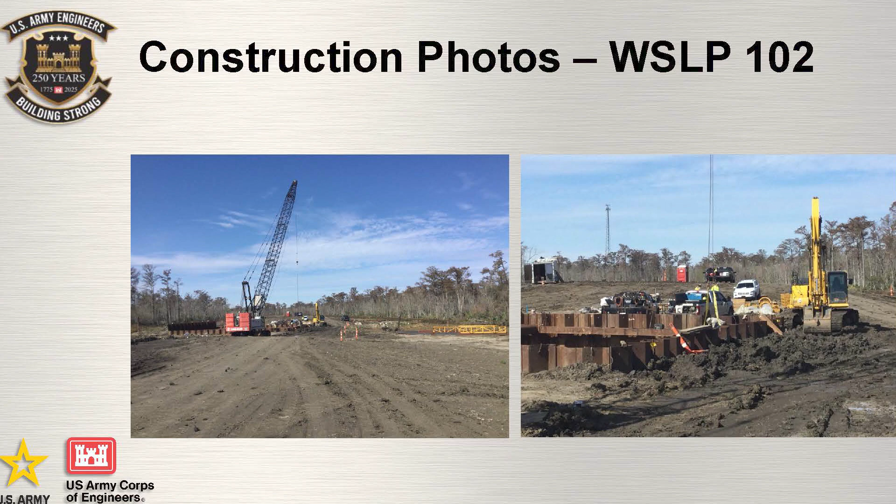The photo on the left is the wick drains, which is another nice-to-know feature. We're building on what we call virgin swamp. It's very, very hard to do the geotechnical, the principal geotechnical elements out there, it's very tough. It's swamp. So we have to get strength in the base of the levee before we can actually build on top. Those little white strip drains, called wick drains, get the water up and out. As we get the water out of the system, the base of the levee constantly gains strength.

And then we have hold periods. I don't know if you guys saw the story we had on Fox 8. We build a levee and then we do absolutely nothing for months and months at a time because we're letting the levee settle, it's building strength. Then we go back, we build more embankment, we wait for months and months, and then we do it again. That's why some of these contracts are as long as 1,500 days, to make sure that we are gaining the strength to build these levees.

Another feature, we'll post things on social media, on Facebook, and we'll use all of these technical terms. What are they talking about? A little pro tip: if you use the Meta AI feature and ask what are wick drains, or whatever it is we're talking about, it's amazing how accurately they'll explain what's going on in layman's terms. I've checked it a few times to see if it was really good, and I believe it's good. So if you ever see anything on our Facebook, the West Shore Lake Pontchartrain Facebook page, make sure to use that feature if you ever want more information about anything.

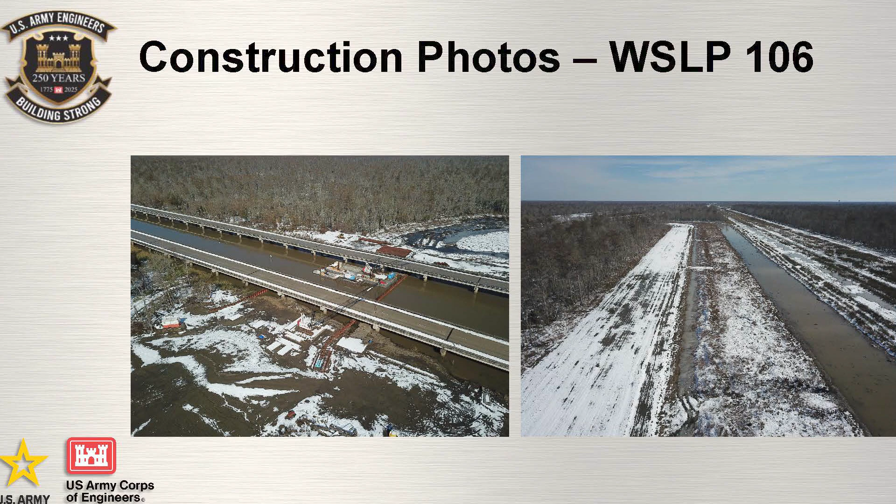And that's the 106, that's the other end where it crosses I-10, and we thought that was a real cool picture when it snowed, the 130-year event, on 106 there. And that's also 107.

109, this is one that just got kicked off last fall. As you can see, we've done clearing and grubbing. You see some smoke there, we're burning at 109, and we're moving. As you can see, it's connected to 110 there. That's pretty much the one I said is pretty much finished, and we're just waiting on grass to grow at this point.

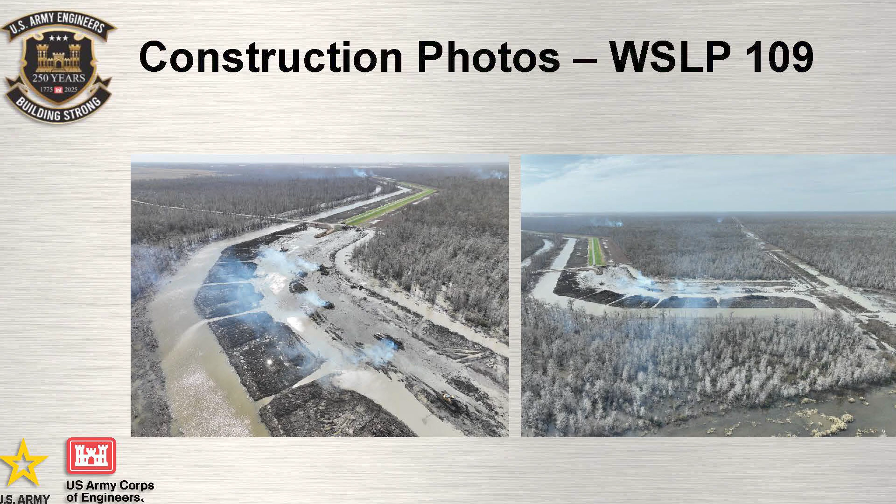The 114A project, this is the drainage structure project. If some of you recall, we had 4 pump stations originally in this project, but in an attempt to save money and be more efficient in our design, it was determined that 2 pump stations was more than adequate, just increasing the size of those pump stations instead of having 4 smaller ones. It was more efficient, more beneficial, and cost effective to do it that way.

So the 114A contracts are 2 drainage structures. They don't have any pumping capacity, but they're drainage structures, again, to get the water out of the system. So those are not the 2 pump stations we're talking about.

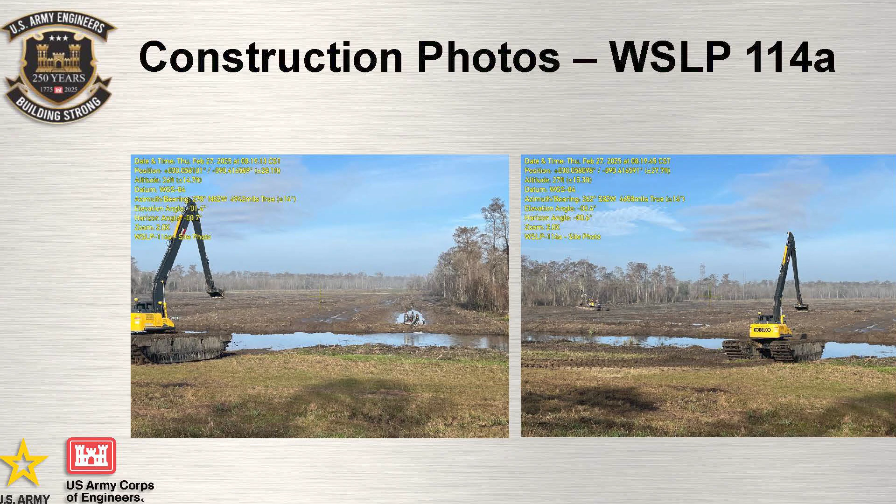So 114 got advertised last month. We are expecting to award in June. That process is going along really, really well. Contractor questions were due yesterday. I think we got 131 questions, which sounds like a lot, but for a pump station that's going to be between $200 and $300 million, that's not a lot. So what that tells us is we probably have a really good set of plans and specs if you don't get a lot of questions.

And just a point of information, if you know anything about the PCCP project in New Orleans, and there was a lot of issues with corrosion and that sort of thing, the same designer who did that pump station is doing this pump station.

So we have a ton of lessons learned. All of that information that we learned from PCCP, we incorporated into this project. So we have some real exotic metals and other measures so that we won't experience some of the issues they experienced on PCCP. That's a good point of information I wanted to share with you tonight.

And then we have two more contracts, 103A and 110A. Those are both small flood wall projects at utility crossings. The 110 is almost completed, but there's one section that's not. Why do you leave that out? Because there's a flood wall and pipelines going right through where the levee is built. You can't put a levee on top of a pipeline corridor, right?

So another cool thing we do at the Corps - these utility pipelines go through our flood wall. So when you're working with 4, 5, 10, 8 utility owners, that's tough. We go out and move forward on the levee work while we work through getting these utility agreements. Fortunately, that's pretty much done - we're almost there with most of these contracts, and we're on track. That's the last two contracts we have going on.

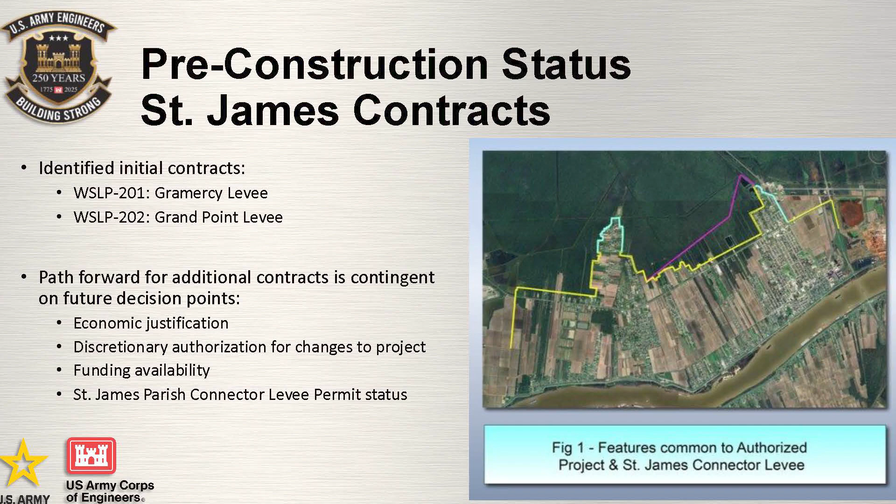We know that there are some features of the St. James contract that, no matter what we select, are going to be built anyway, so we were authorized by our leadership and command to go start those projects. If you are from St. James Parish, here are the two fuchsia sections at the ring levees that, no matter what alignment we wind up building, those features are going to be built anyway, so we started on that.

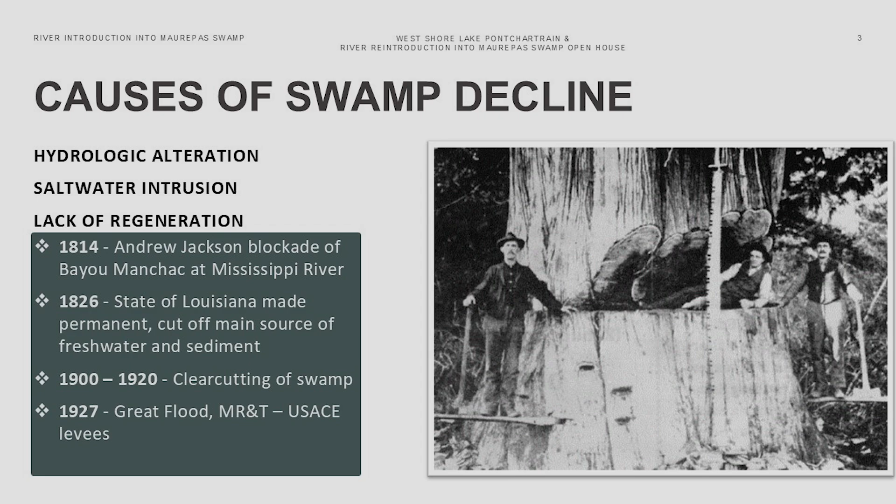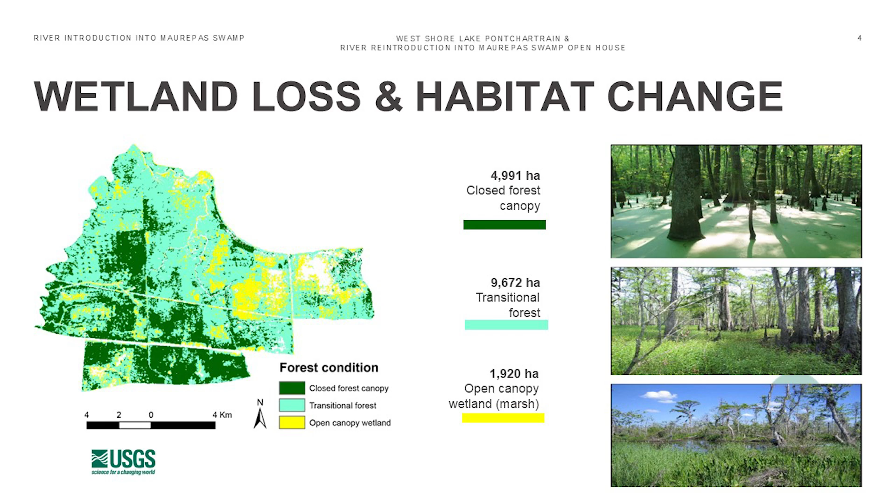The concept never changed until in 2018, West Shore Lake Pontchartrain got authorized. At that point in time, we took a little pause. We were at about a 95% design level. In 2017, we got money from the Deepwater Horizon oil spill to finalize design. We got all ramped up, got our contractors on board, and then West Shore got authorized, which is an awesome thing, right? But we quickly realized that these two projects are next door neighbors.

Around that time, we also came to the Corps and said, hey, first of all, we got to cooperate really, really closely. Also, is there a chance we can use the benefits from Maurepas as mitigation for West Shore? We got our higher-ups together, and that process took a couple of years. We, for the first time ever, made it so the benefits from Maurepas can be used as mitigation for West Shore. It took a ton of collaboration. We had to redo a bunch of studies, which no one likes to hear, but in the end of the day, it worked out great.

So now, if you remember a few slides ago, we had conveyance channel and guide levee. Now on the west, we have guide levee, conveyance channel. On the east side, the hurricane levee. They are literally the same exact project.

Jeff mentioned drainage some. We have a drainage ditch on the west side and on the protected side of the east side. These two ditches - this is a cross-section between River Road and Airline Highway - there's going to be two ditches on each side to convey all the surface drainage to Airline Highway. Once it gets there, it's a little tricky. That's where West Shore goes off towards LaPlace, and Maurepas goes north into the swamp.

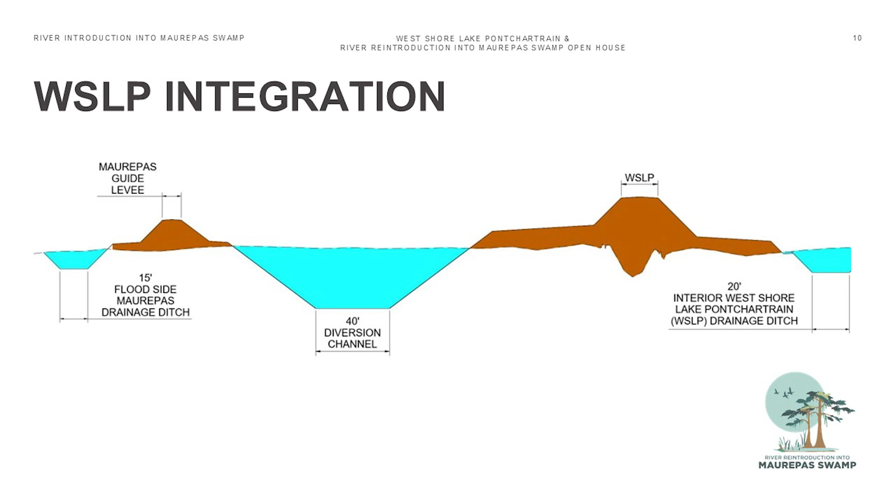But we have worked with the Corps, we've worked with the parish, we've relooked at the models. These two ditches will definitely convey all the surface drainage in those areas north to Airline Highway, just like it always has worked - everything drains from the river north. And so that's kind of what a cross-section looks like now.

As far as the construction timeline, we named our reaches too. Our reaches go 1 through 6. The Corps go 1 through 14, but one of us did it backwards apparently. The black and white ones are the West Shore reaches. Our reach 1 and 2 is going to be built along with West Shore reach 113. Reach 3 is West Shore 112, and then reach 4 and 5 is West Shore 111. We're currently building reach 6 right now, and us as well. We'll be done with everything in 2028.

So just a little bit of what to expect. Really, these two projects between Airline and the river are going to be a lot more visible than the work going on in the swamp. So the next couple of years, residents of the Garyville Mount Airy area are going to see a lot of activity. I need to get new contacts, but I'm going to step here so I can read this.

So some of the elements on reaches 1 and 2: you have the headworks in the river, a Highway 44 raise. There will not be a gate there. There's a sedimentation basin, railroad crossings, and drainage improvements. Again, the activities are excavating, pile driving, road work, concrete pours, material and equipment, road detours.

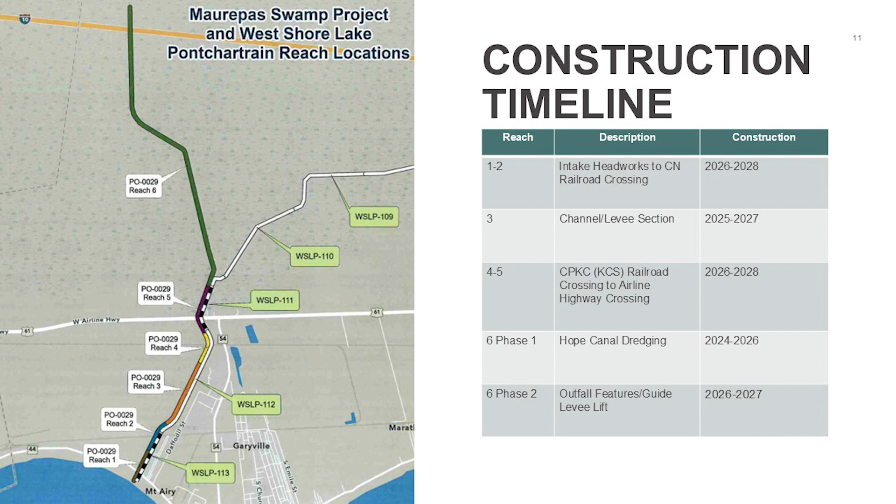When everything's done, at the end of 2028, there'll be a brand new boat launch on the west side of the channel. So the diversion channel is on the west, the levee's on the east. So just the diversion channel and levee are going to cross Airline Highway, just a few hundred yards west of the new Bergerons. So we're going to have a brand new boat launch off Airline Highway into Hope Canal.

So this is going north towards the lake. Now you can't go south because there's a bunch of culverts, unless you have a really tiny kayak, but the public will be able to access Hope Canal just north of Airline Highway. Brand new boat launch, better than the one that's there now, but that one is going to be closed for a couple of years during construction.

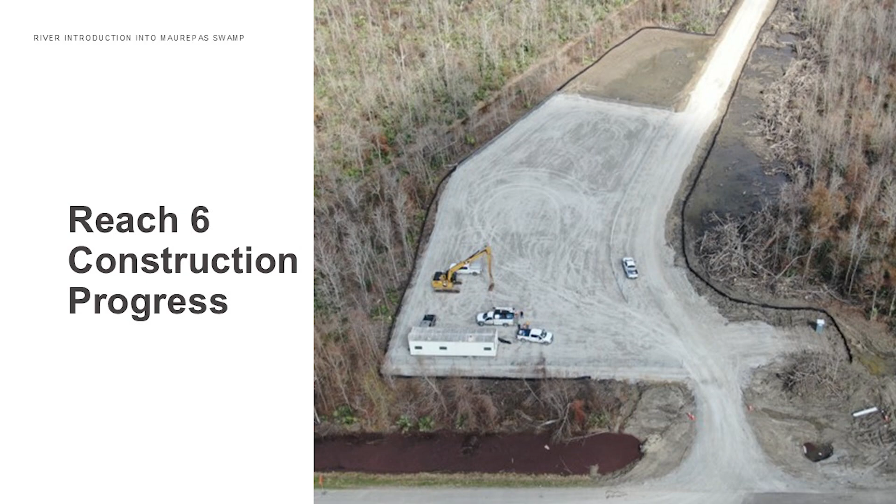And this is just, I know Mr. Geiger, I think, is here, just a few hundred yards down from his driveway to the west is our access. This is actually Airline Highway right here. So Phylway Construction has built a little laydown yard. This road here, this is looking south now. That's the Wildlife Fisheries launch, and this is where our excavation of Reach 6 began.

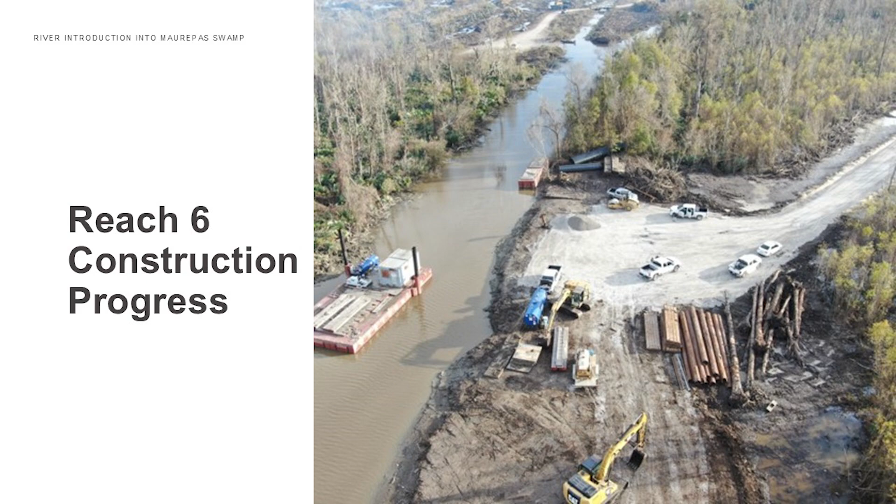So this phase of construction is to widen Hope Canal from just north of Airline all the way to I-10. Here's looking up Hope Canal right now. They grubbed it, they're starting to dredge the channel, and that'll be ongoing for about the next 12 to 14 months. So that's where we are with Maurepas.

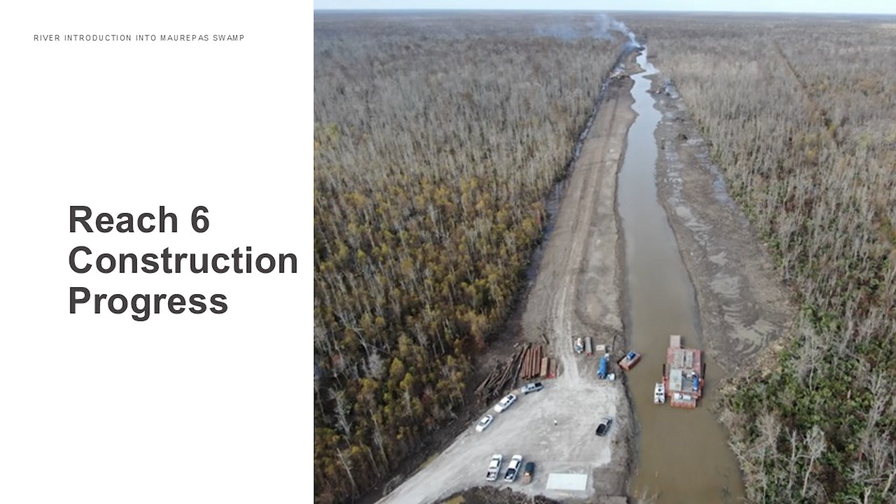I can't emphasize the importance of us working with the Corps, using it for mitigation. A lot of firsts were done. We're working better with the Corps and the levee district now than we ever had before. So it's just, the projects are both great projects. They're for different things, but they're working together. So we're happy to be here and teach you guys about them.